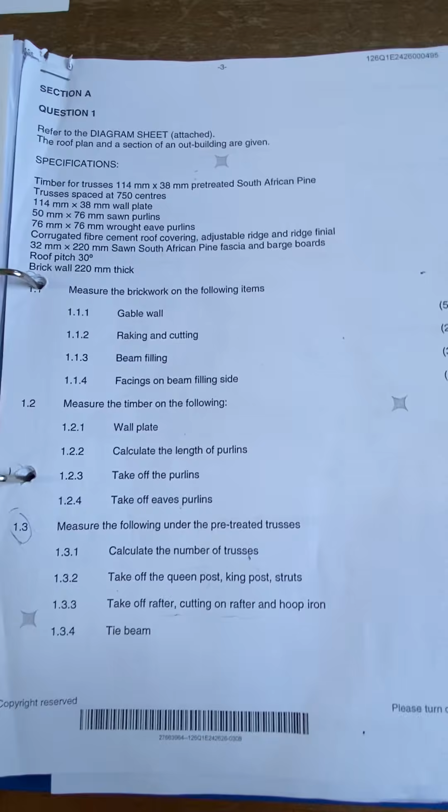Morning, guys. Today we're gonna be looking at a roof.

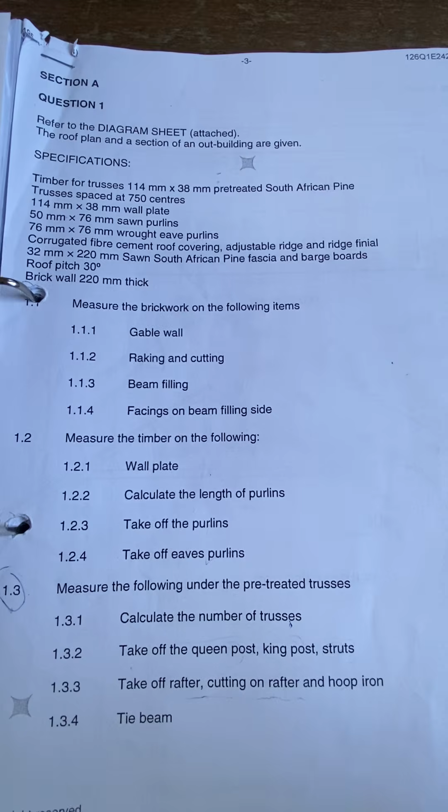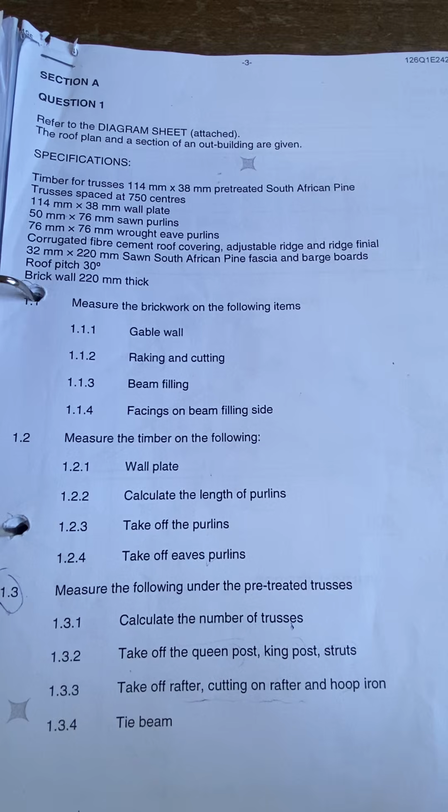Okay, so this is info roof. So basically, the question goes like this: it says, refer to the diagram sheet attached. The roof plan and a section of an outbuilding are given. So you're gonna analyze the roof just now, the addendum there. Then it goes like timber roof truss. It is made up of 114 by 38 treated South African pine. Trusses are spaced at 750 center to center.

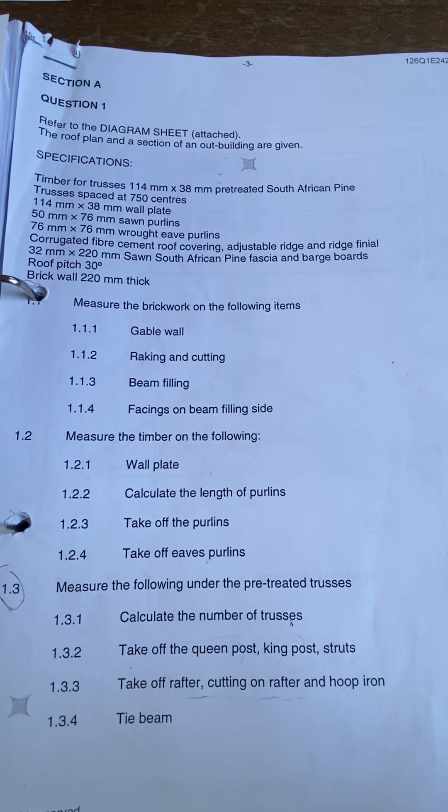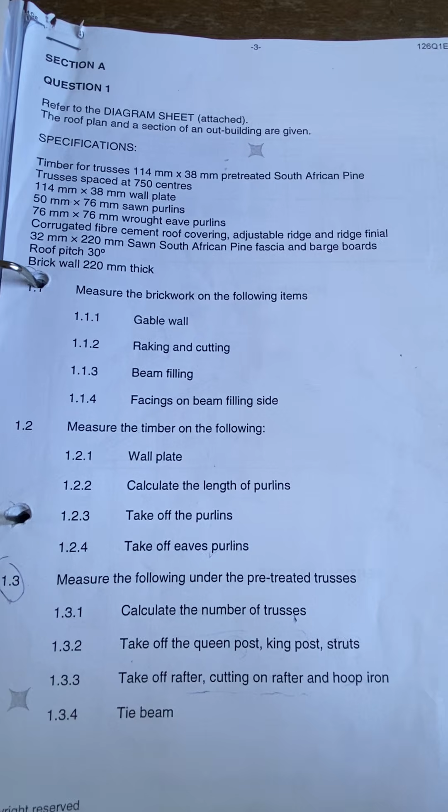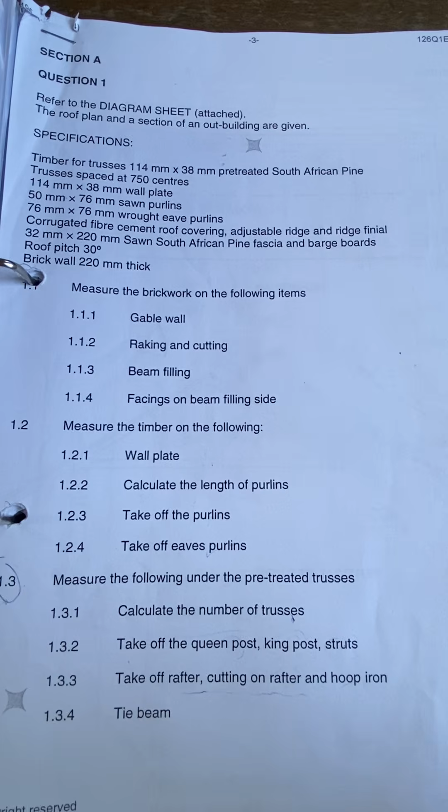And then 114 by 38 wall plate. We have 50 by 76 millimeter sawn purlin, and we have 76 by 76 wrought eave purlin. Okay, we've got corrugated fiber cement roof covering, adjustable ridge, and ridge finial, fascia. 32 by 220 sawn South African pine fascia and barge board.

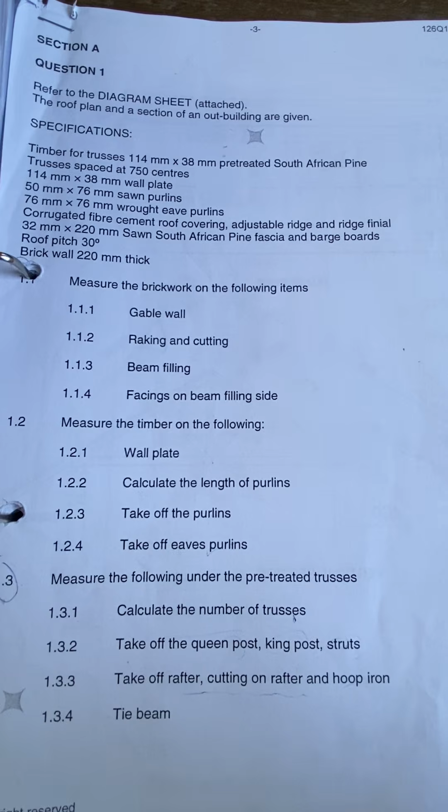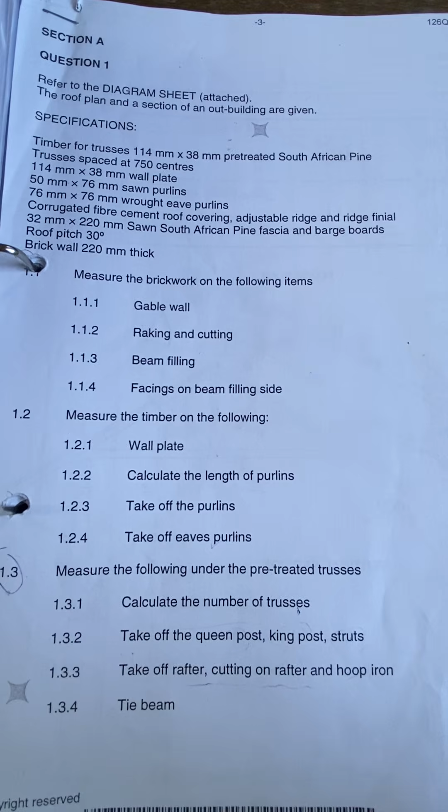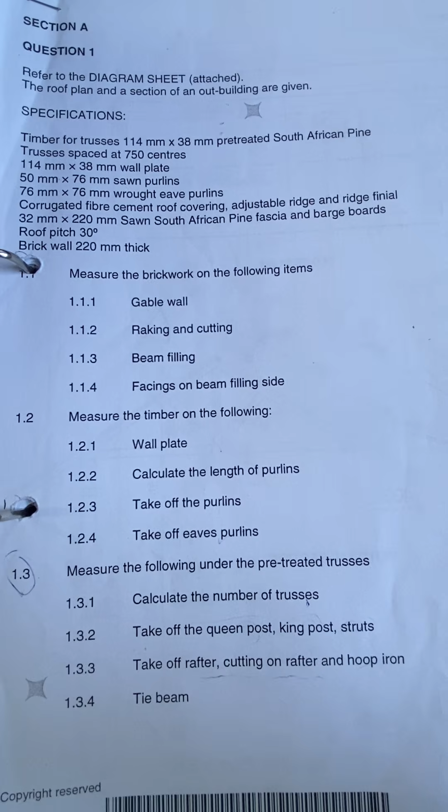The pitch of the roof is 30 degrees. We have a brick wall of 220, meaning one brick wall. Then we've got question 1.1, which talks about the gable wall. Then we've got 1.2, which talks about a timber. Then we've got 1.3, which talks about a timber, but the roof truss.

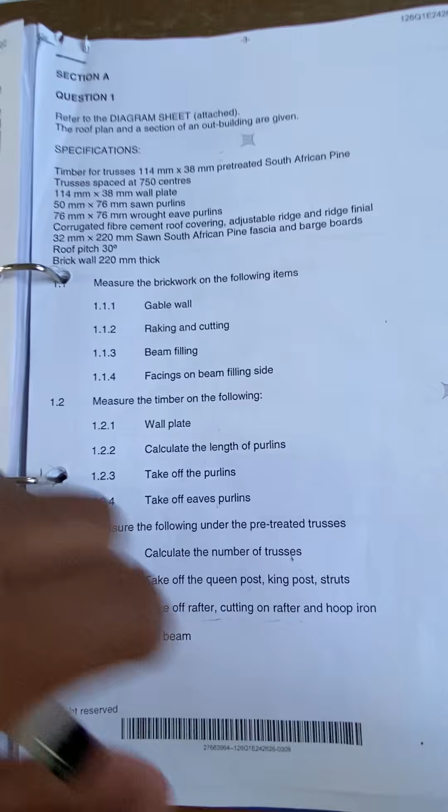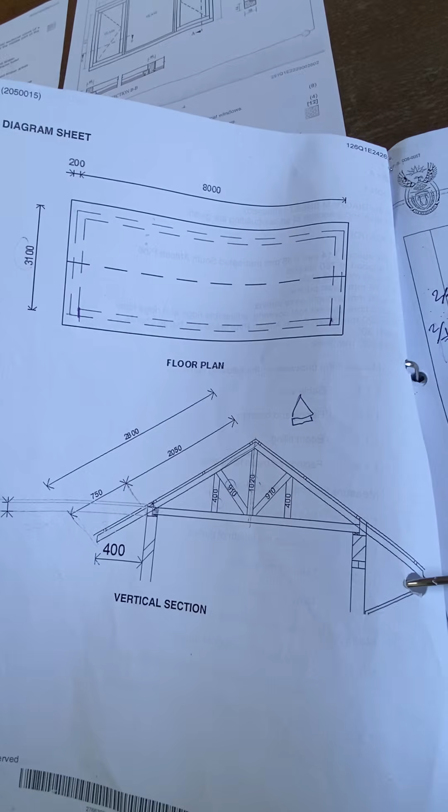Okay, so let us analyze the drawing. The roof is given like this: from corner externally to corner externally of the brickwork, it's 8,000. We've got an overhang of 400. On the gable side, we've got an overhang of 200. The width of the building in brickwork, external to external, is 3,100. Then we've got a section here which shows the overhang of 400.

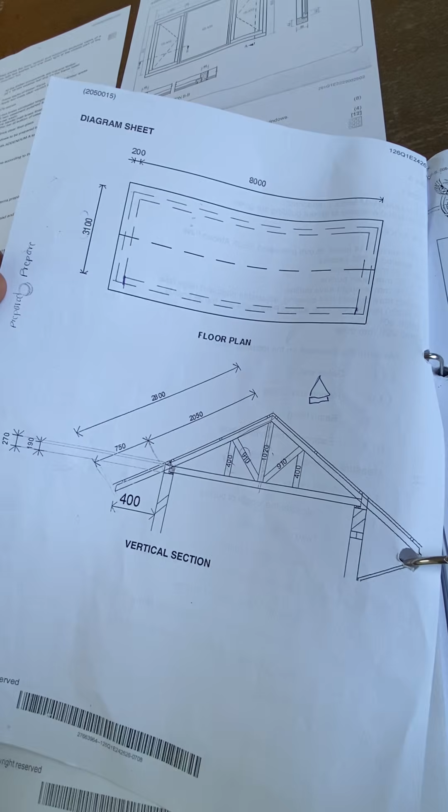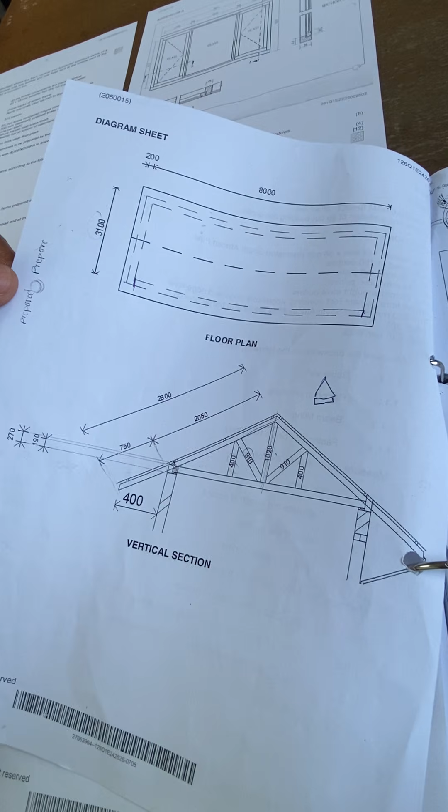We've got a tie beam, a South African truss. We've got a 2.8 rafter. Other measurements are given there. We can clearly see that we've got a beam filling, and also we've got a wall plate under a truss. There are the dimensions of the beam filling on the side: 270 is the highest height of the beam filling, the lowest is 190. Okay, so that's the drawing.

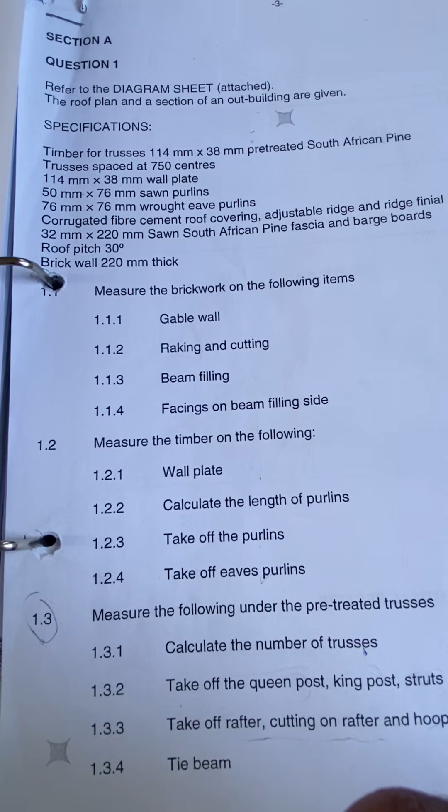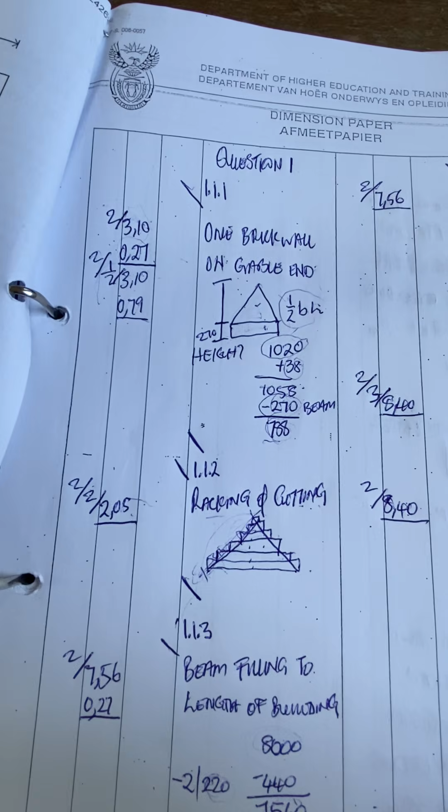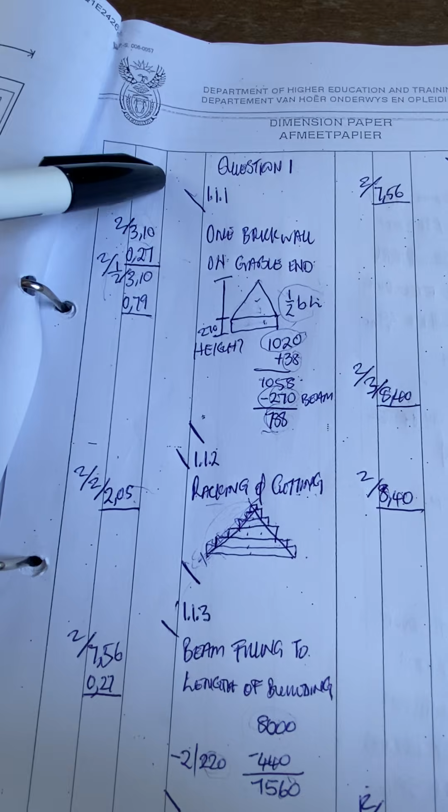Now let us see what is the first question. They say measure the brickwork on the following item: the gable wall. Now, what you need to understand about a gable wall is it's made up of two shapes: a rectangular shape and a triangular shape. Remember this is dimension paper, consisting of timesing, dimension, squaring, then a description. On the description, this is where you will describe your wall: one brick wall on gable ends.

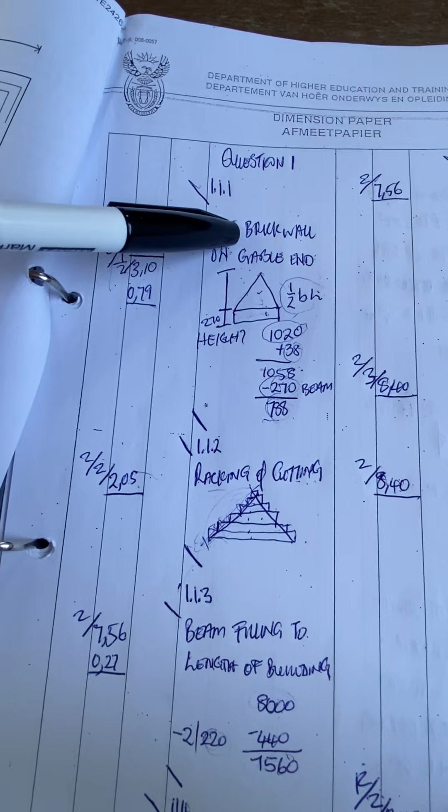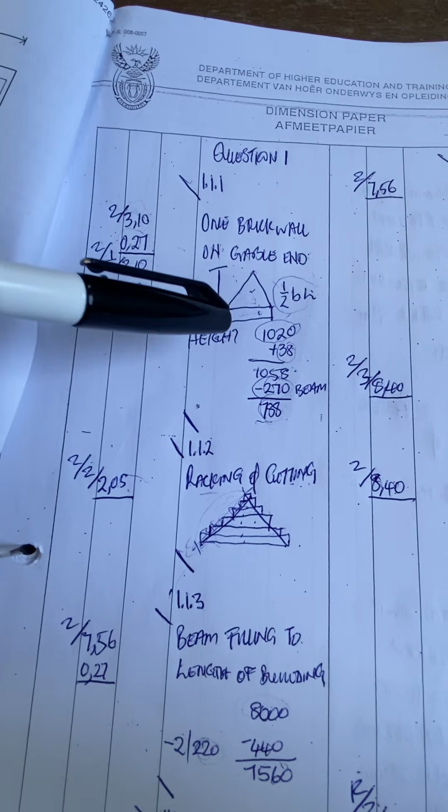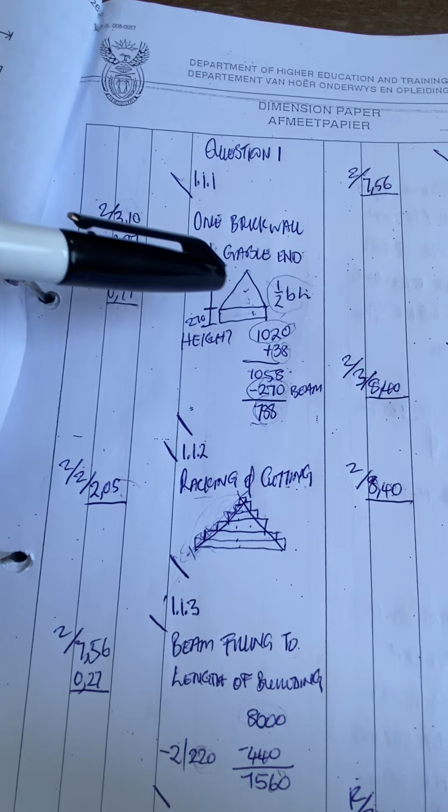So I drew the shapes of a gable so that you can understand. What you see here is a triangle on top, and what you see at the bottom is a rectangle. This rectangle is of a beam filling, so it also appears on the gable end. Because of the gable end, I need to understand the height. When we analyze the drawing, we can clearly see that the height of the roof truss is given at the king post as 1020.

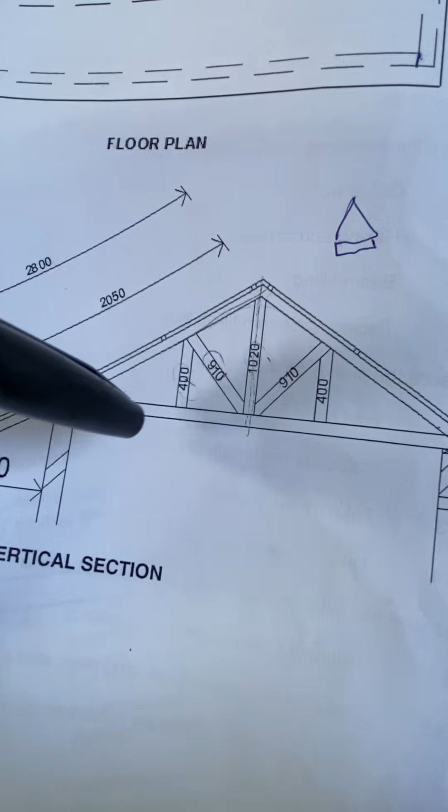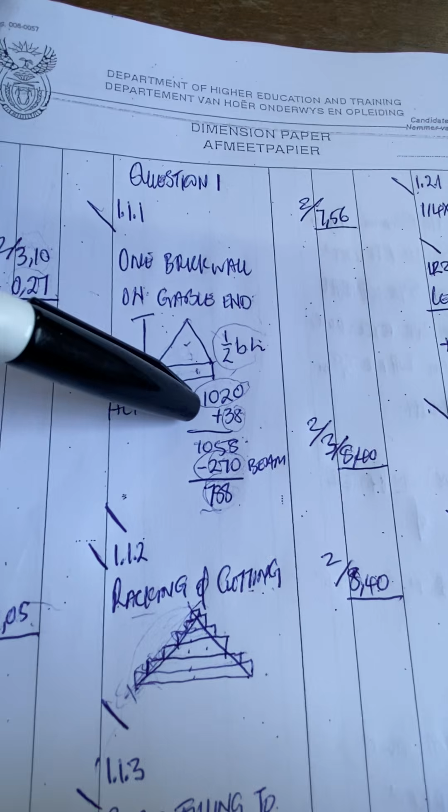But we know that this is sitting on a thickness of 38 for a wall plate. So the brickwork on gable ends will start below the 38 of the wall plate, which means that 38 is part of the height of the brickwork on the gable end. So we have this 1020 of the roof truss, and we include 38 because it's part of the brickwork of the gable end, so that we have 1058. That's the overall height of the brickwork, including the triangle and the rectangle.

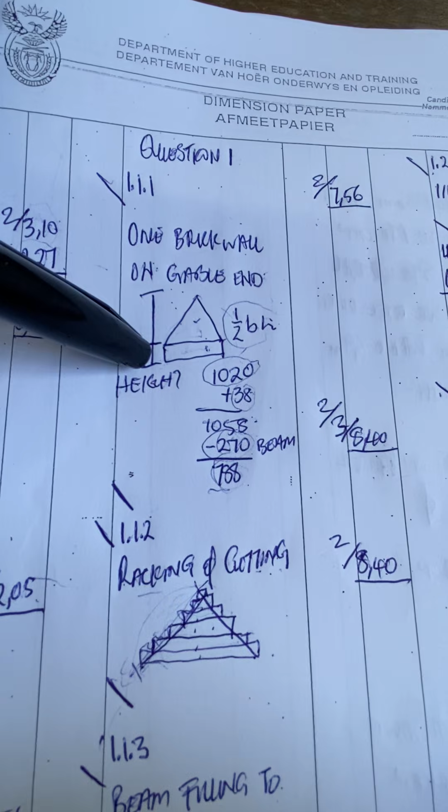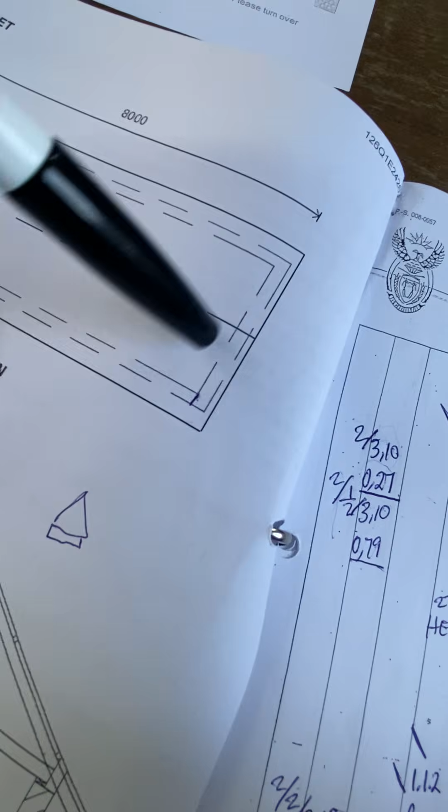So how we measure this: remember, when we measure a rectangle, we need to follow the order of our dimensions. The length is taken from the gable side. On this gable side we have this measurement 3.1, that is why you see 3.1 here. That's the length. The height is given here, the dimension of the beam filling. We take the highest one.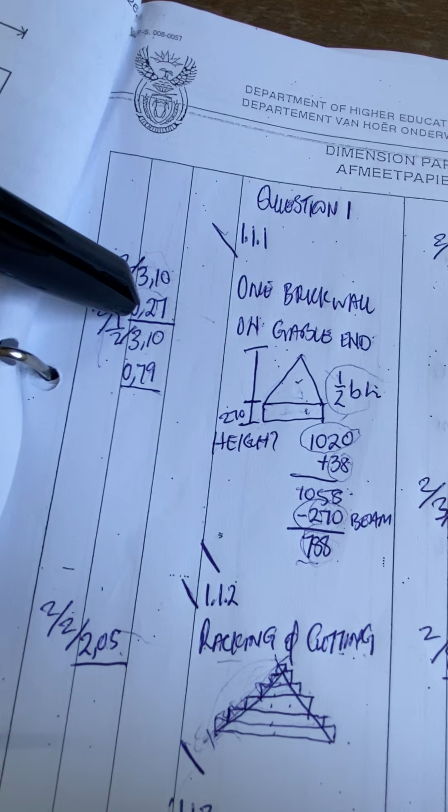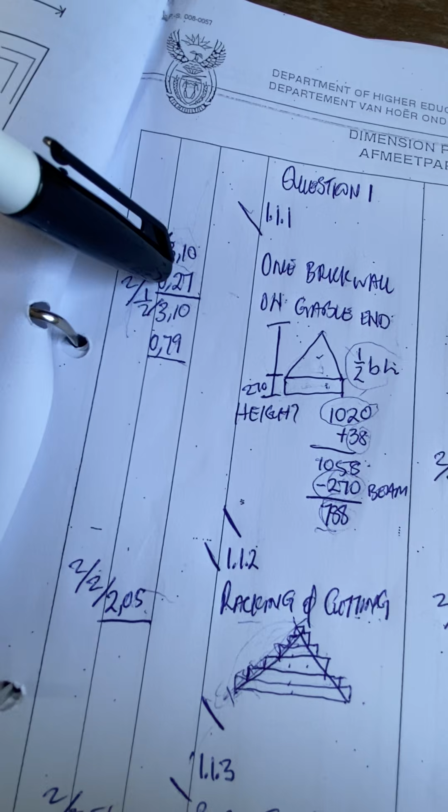So this is the area of the rectangular brickwork on the gable end, and it is of the height of the beam filling. Now this is one side. 3.1 times 0.27 is one side, and because we have two sides in the building, we multiply by 2.

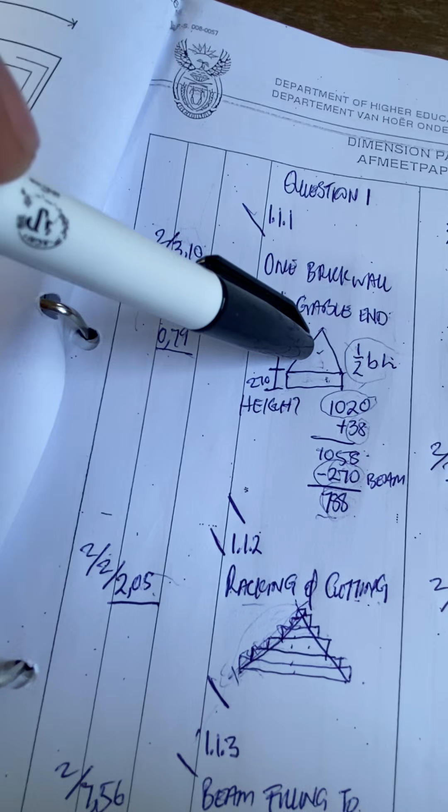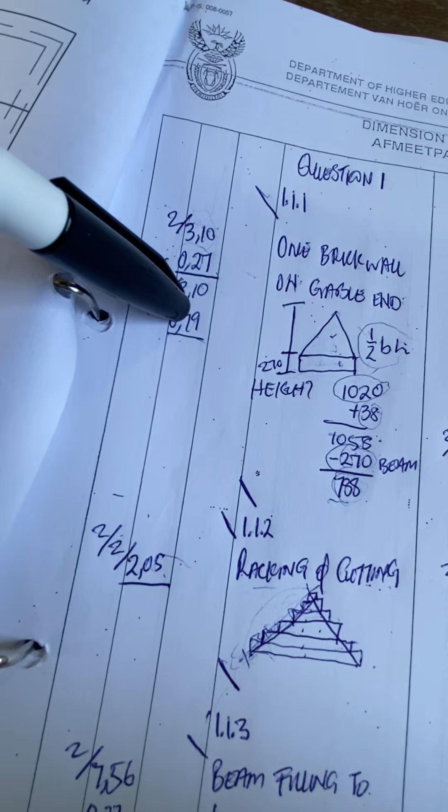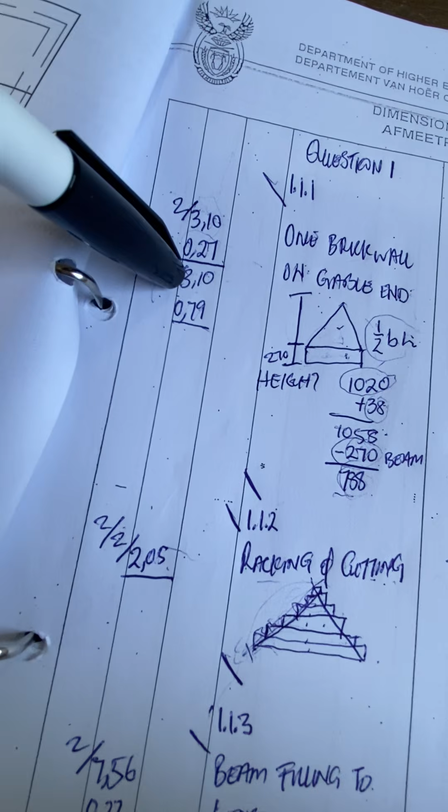Now, since we are done with the rectangle, we need to do the triangle. We all know that the formula of a triangle is half base times height. When we express the dimensions here, we need to follow the formula to indicate that it is a triangle. That is why you see half, our base is 3.1 and our height is 0.79. How did we come to 0.79?

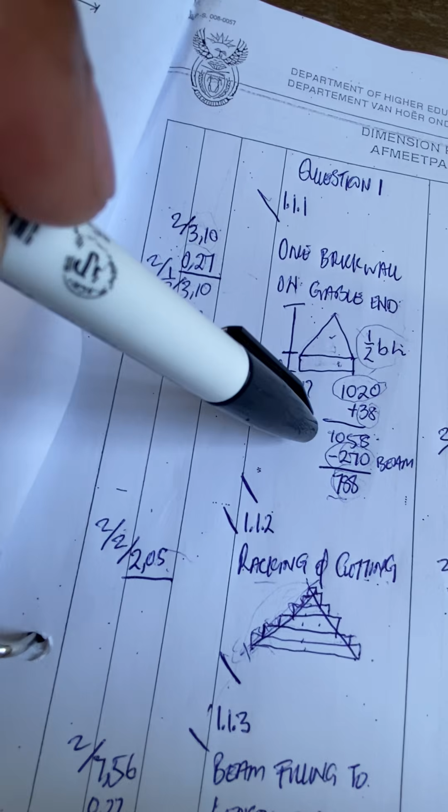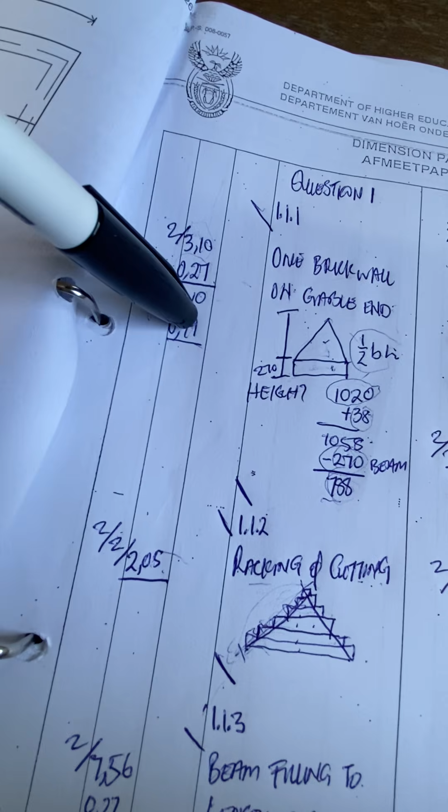Remember, the overall height of the rectangle and triangle is 1058. We minus 270 simply because we have dealt with 270 first. To include the triangle alone, out of this overall height we subtract 270 so that we are left with 788. In meters, this is going to be 0.79.

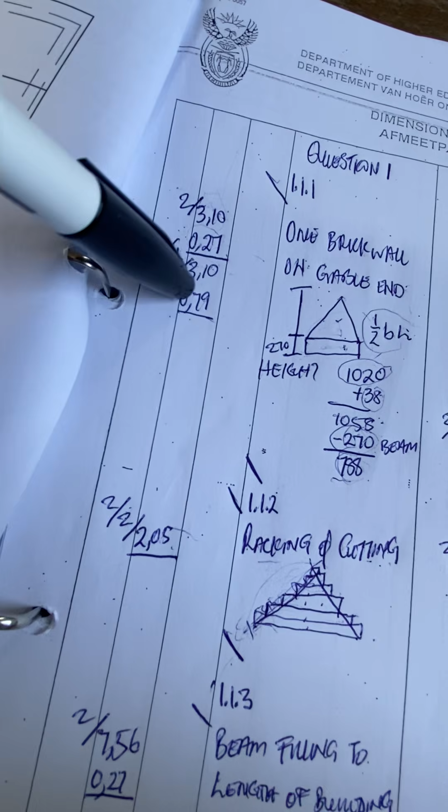Okay, done about the brickwork, because once you say half base times height, you need to say times 2 to include the other side. Okay, so the next question says, let us do a raking and cutting. So to do a raking and cutting, this is what you're gonna do. You're gonna indicate that you are doing a raking and cutting.

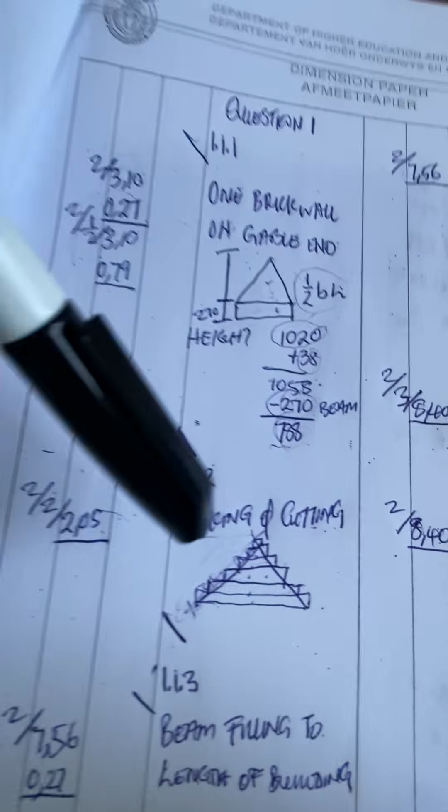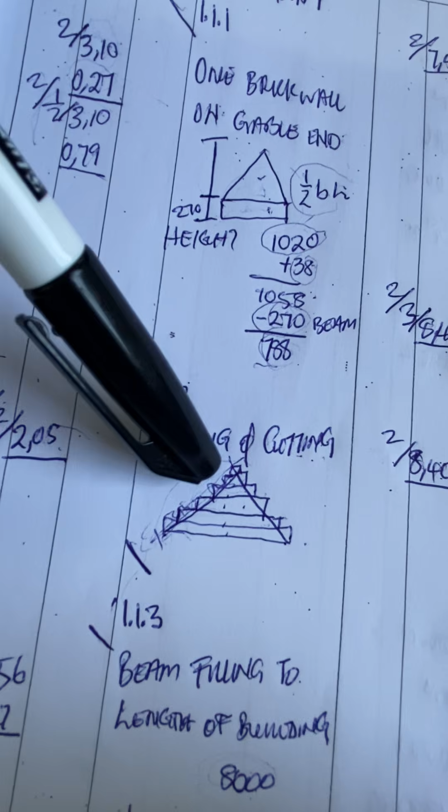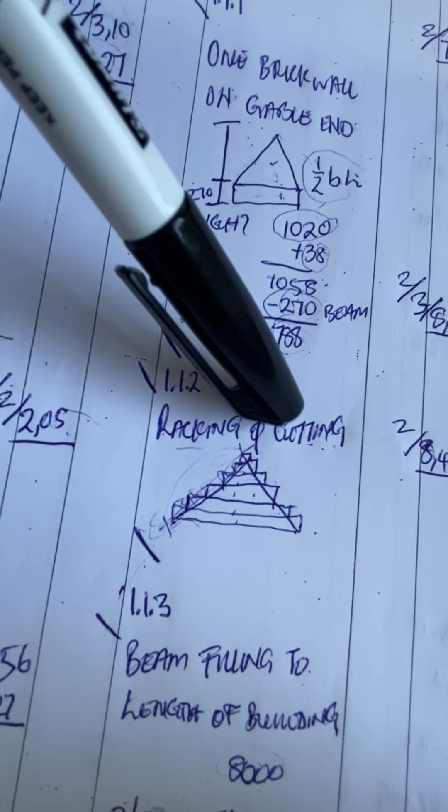When we build that triangular shape of a brickwork, we are using rectangular bricks, which will leave us this shape of steps on both sides. So for us to get a clear triangle out of this shape, which are our steps made up of brickwork, we need to cut this projection so that we can have a smooth triangle like this.

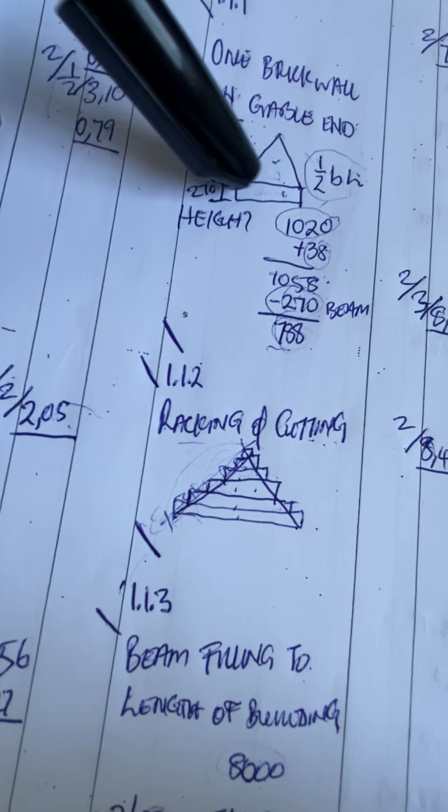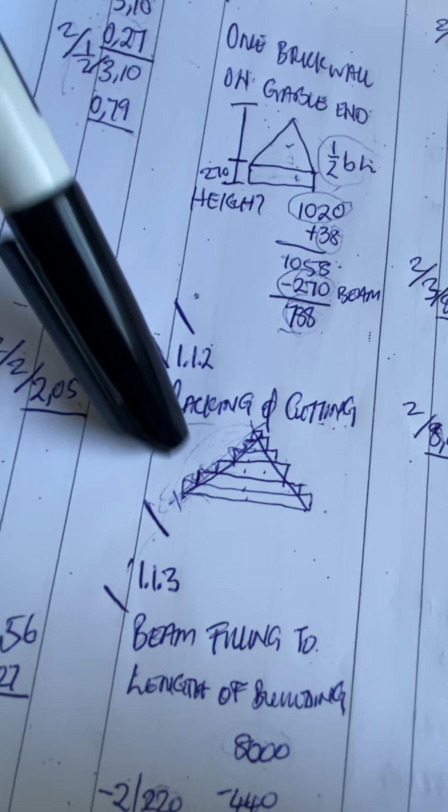If you are using bricks, you can't simply get this smooth triangle. You will get something like this, but you will have to cut this raking. That is why we are doing the raking and cutting. You're gonna remove this raking by cutting. So that is how we get this smooth triangle. I drew this so that you can relate to what I'm saying.

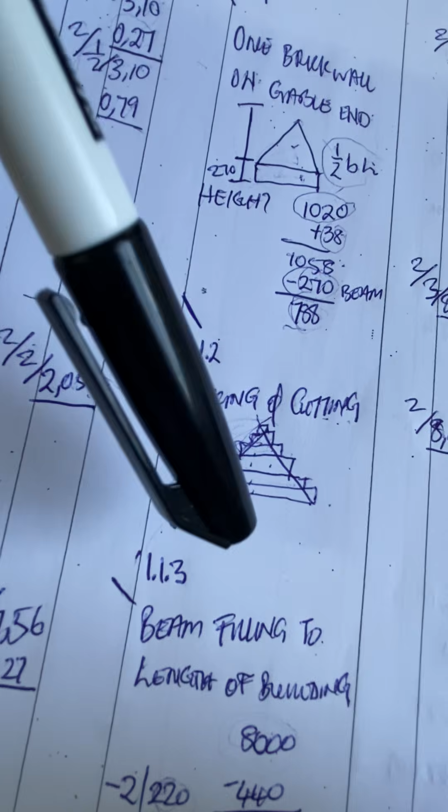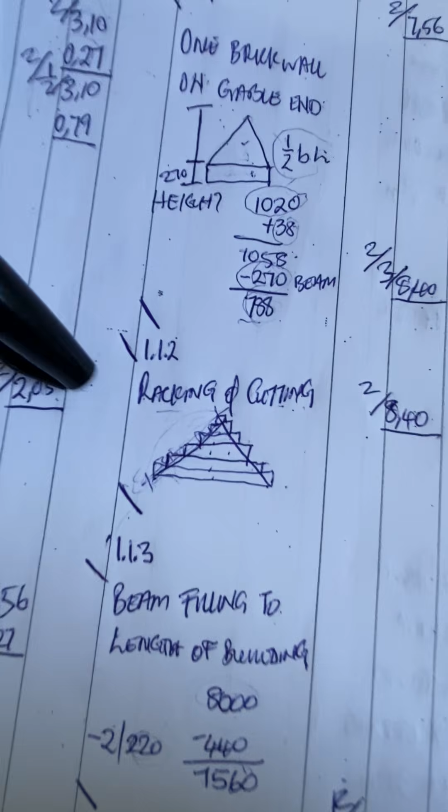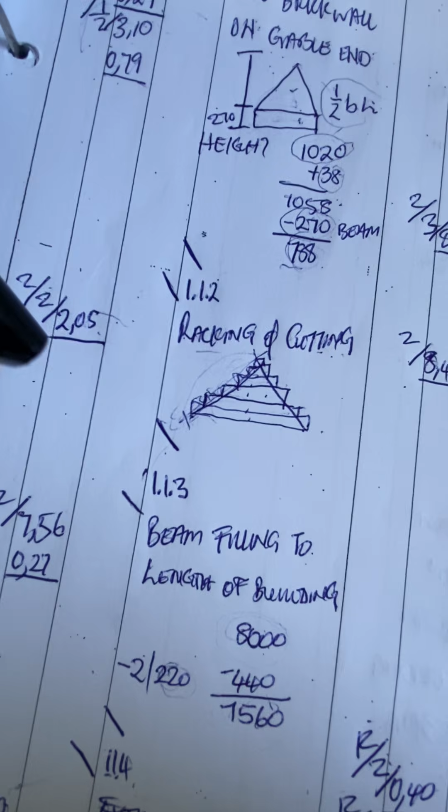So this thing is measured in linear. If we measure this in linear, how much is this side of a triangle? There you go. This is the size of the triangle. It is 2050. So we come back here. We have 2050. This is just one side. So to include this other side, we're gonna say times 2. That is just one side of the end

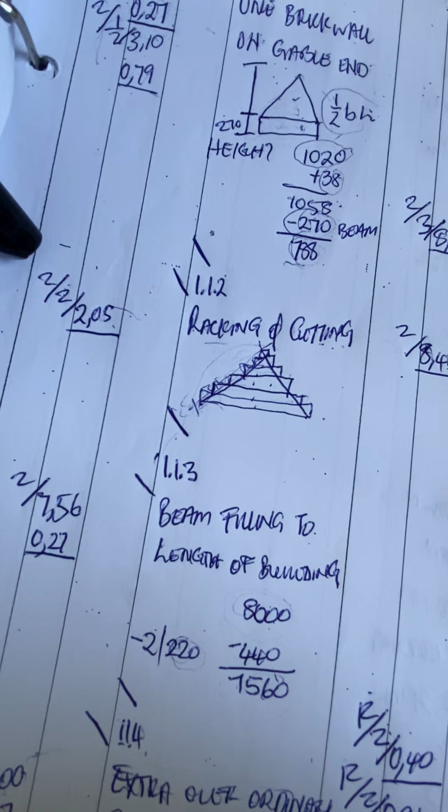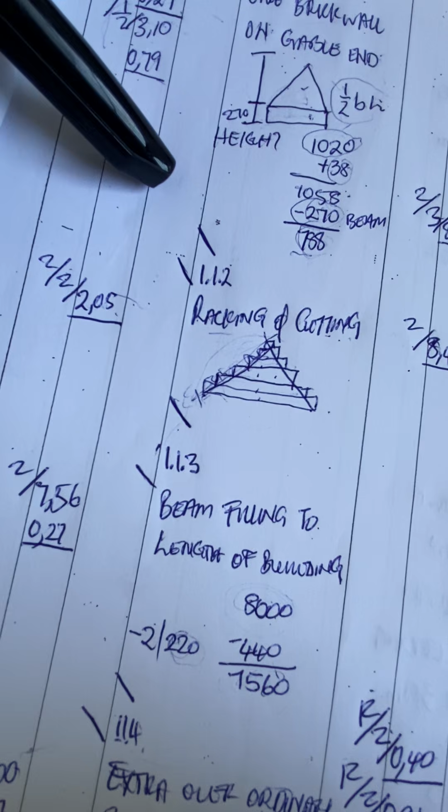of a gable. So to say there's an opposite side that looks like this, you want to say times 2. This is 2050. Within this triangle we have two sides; that's the first 2. To include that there is an opposite side on the building, that's the other 2. I need you to understand that.

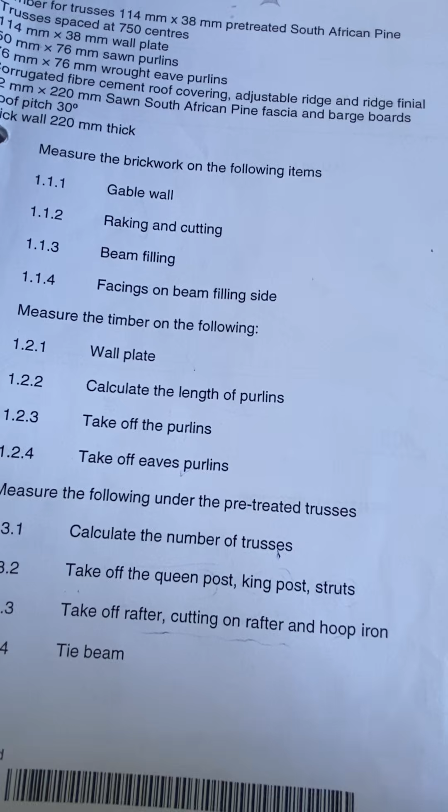Then the next question says, let us do a beam filling. So this is the gable side and that's also the gable side. As you see what I drew here, this is the end of a gable. This is also the end of a gable. Where you see these lines, that is where you will find the beam filling. It takes the internal measurement, because on this side we have a gable and the brickwork.

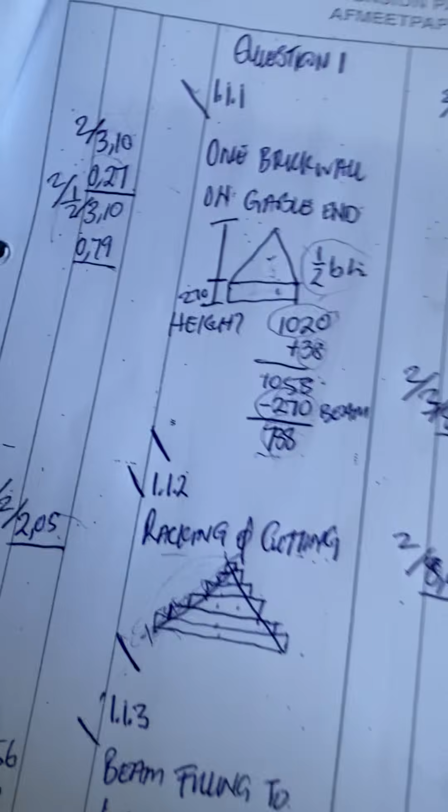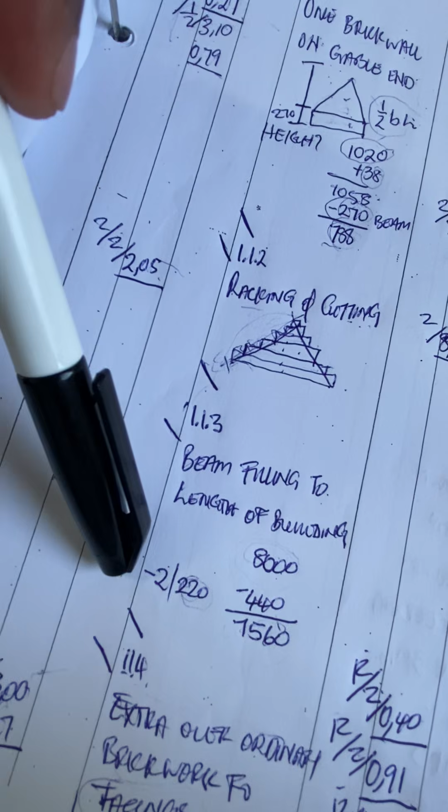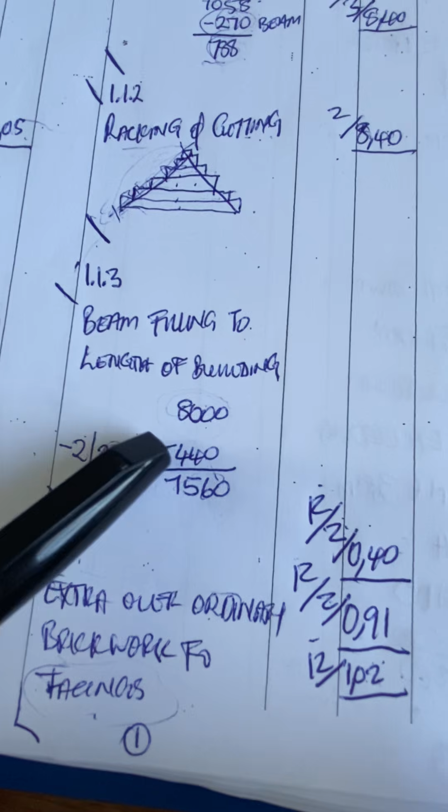So if we understand that this is the length of a beam filling, we have a beam filling to the length of the building. The length is 8,000 external to external. To come to internal, we need to subtract 2 times 220, which gives us 440. The 220 is the first one, the second one is on this side, which makes 440. So 8,000 minus 440 leaves us with 7,560.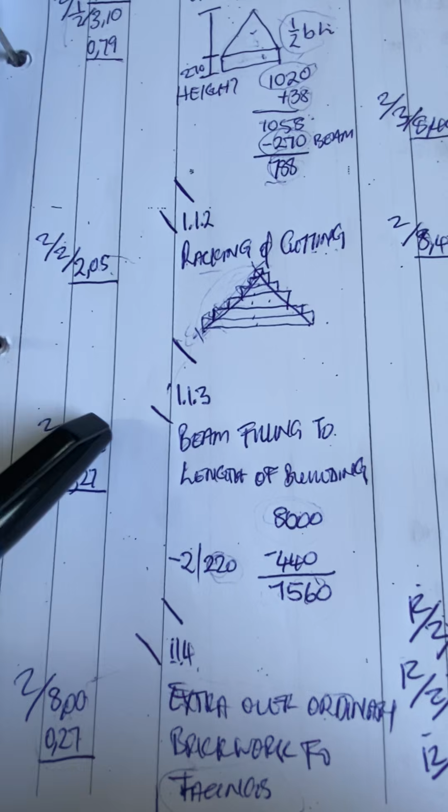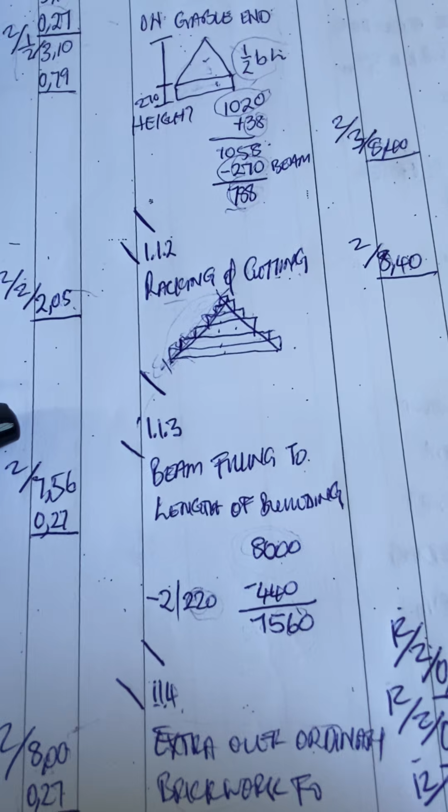Then we take this and come here. We say the length is 7,56. Now the height of a beam filling is 0,27, given there. This area is for the one side. If it is the front side, at the back you also find the same thing, because we have an opposite side. That is why we say times 2. Clearly, that is what we're going to be doing.

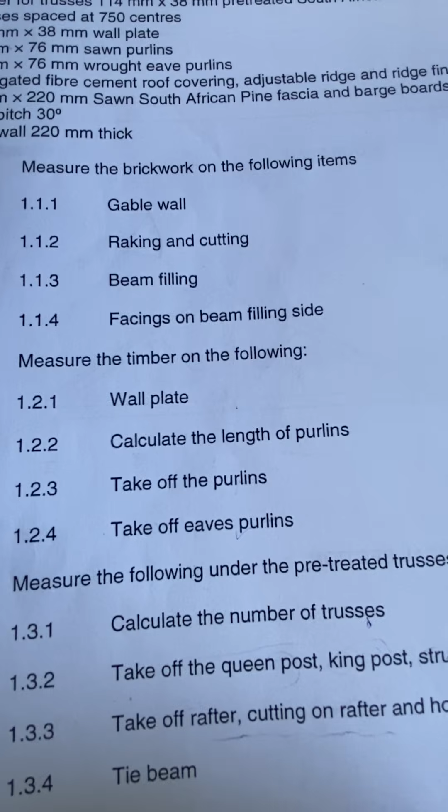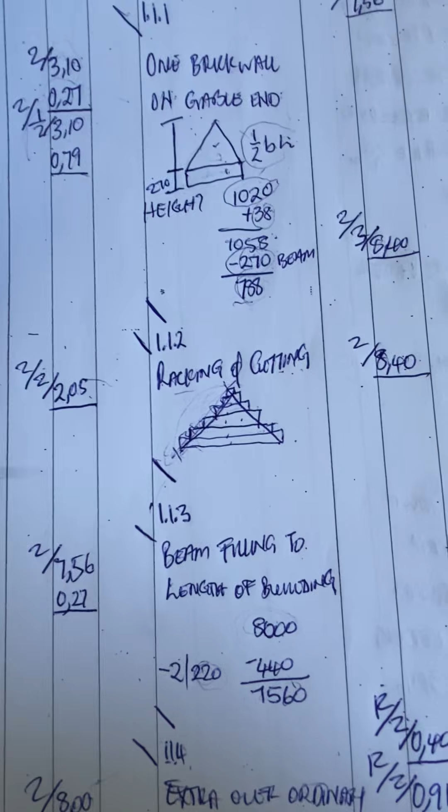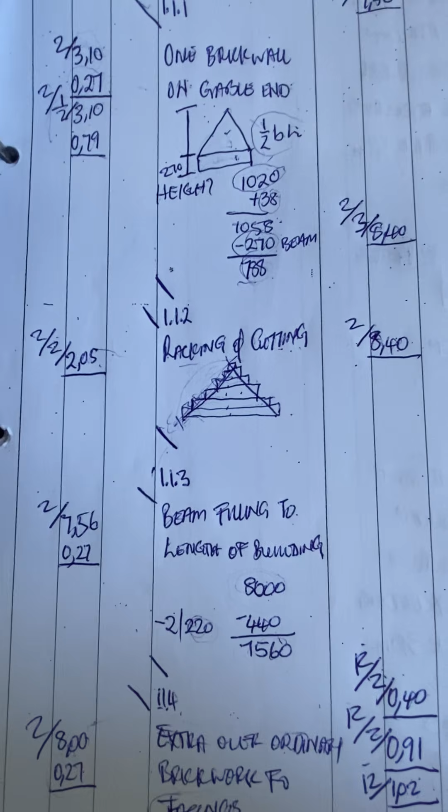Then the next question says measure facings on a beam filling side. Now guys, I need you to understand this. Before we determine the measurement of the facings, what are the facings? The facings are the pattern that we see on the elevation side after the building has been erected.

How did they lay the bricks? It's 220 one side, 220 one side. That gives me an indication of English bond. So since that's English bond, what I see are the facings. Let us get back to the question. Since we understand the facings now, you describe these as extra over ordinary brickwork for facings.

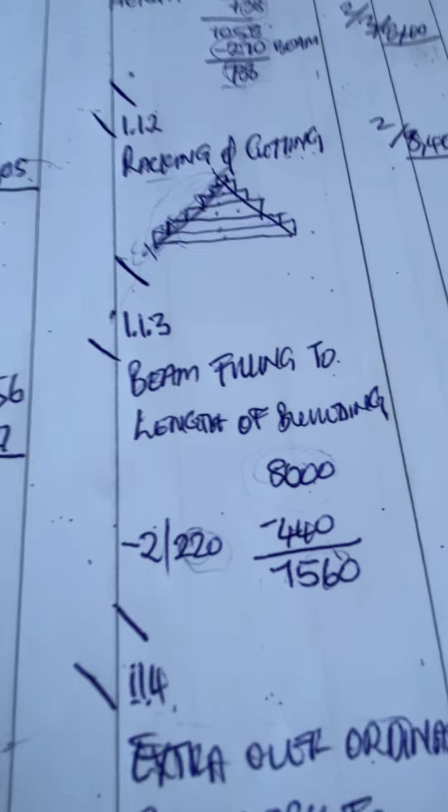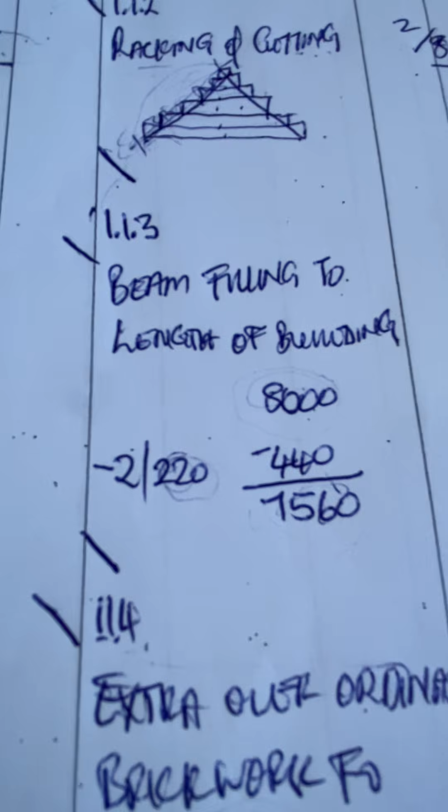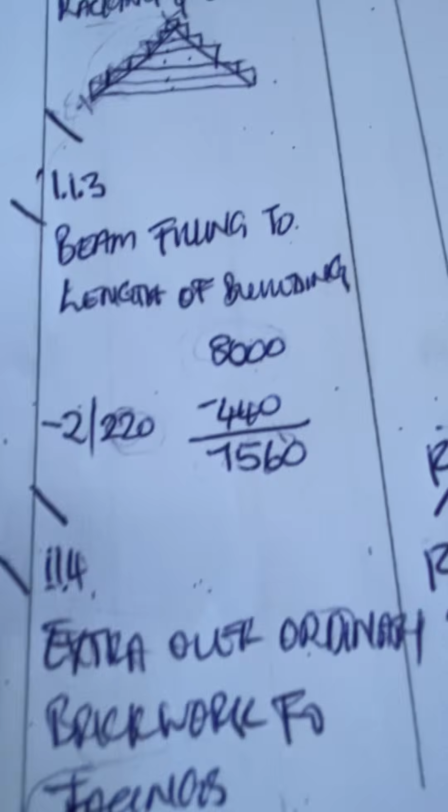Why are they extra over? Because we have dealt with the brickwork alone. We are still measuring the brickwork now, but for the second time. Since we're doing it for the second time, this becomes the extra over, because it's not the first time. Now we understand the facing.

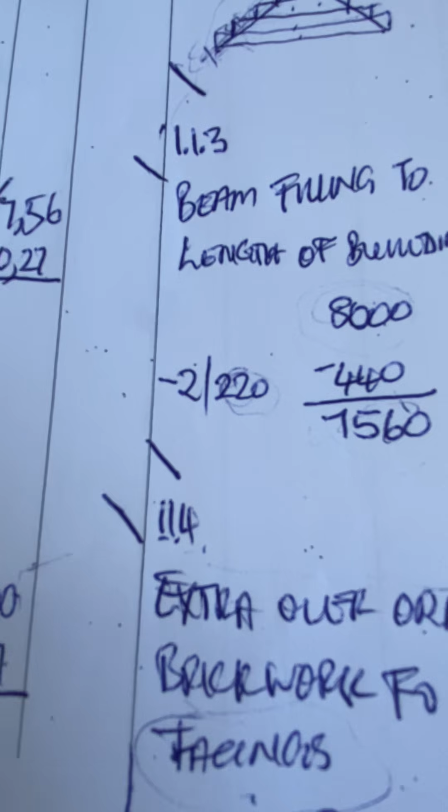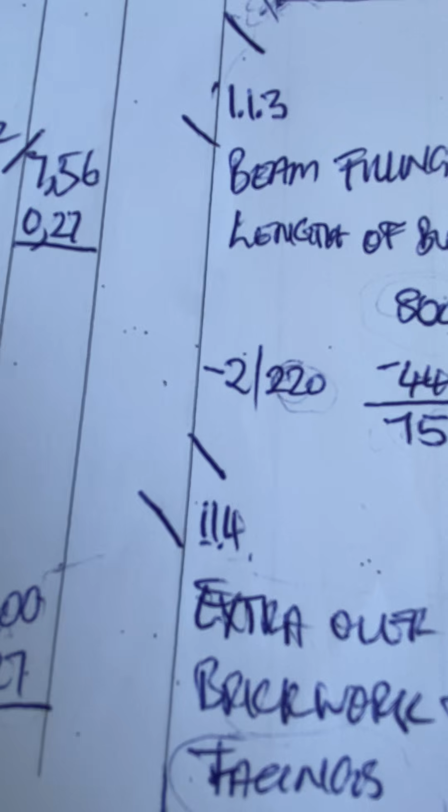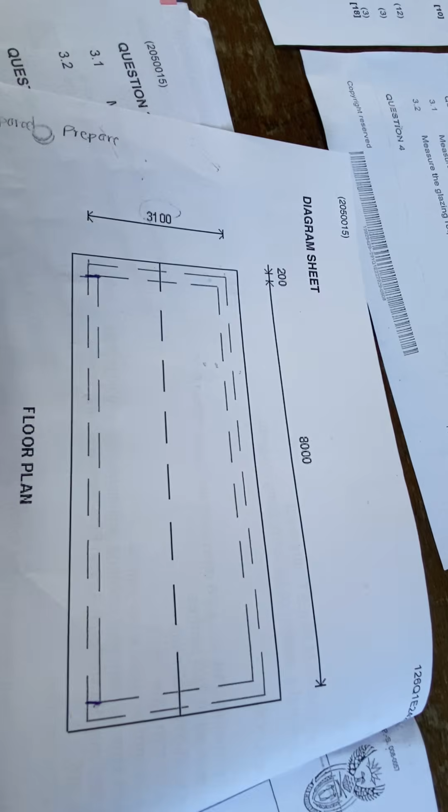When we look at the beam filling, remember I said at the gable end we have a rectangular shape of brickwork which stands for a beam filling, before the triangle side. Even on the gable end we have brickwork for a beam filling, while we also have a beam filling on this side. The beam filling we measured as brickwork starts from internal measurement. But when we look at the pattern of the brickwork, it starts from external to external.

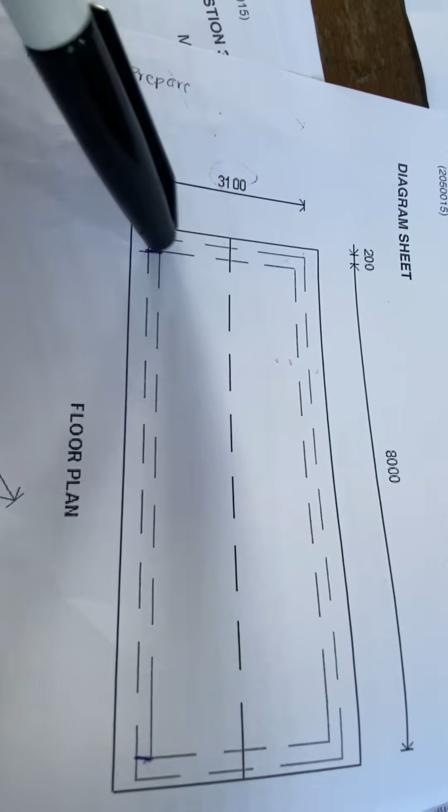External to external, those are the facings. The pattern of a beam filling doesn't start from internal, because we also have the brickwork in beam filling as a rectangle here and here, so we have it all around. That is why we take 8,000 as the length, not 7,560. So 8,000 times 0.27 for the front side. To include the back side, we say times 2. So we are done with 1.1.

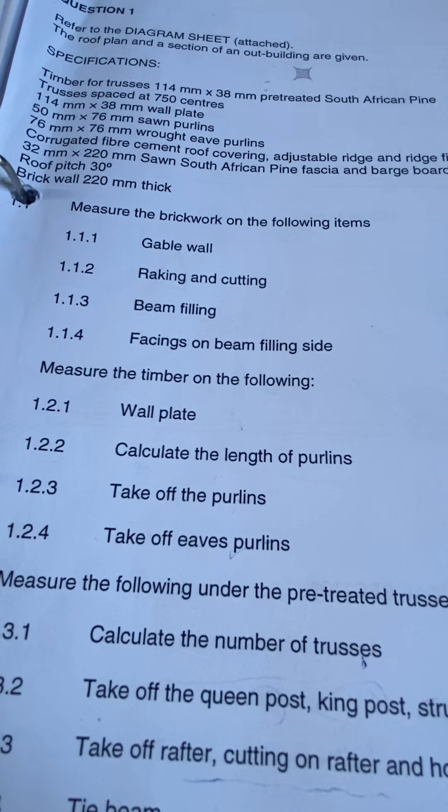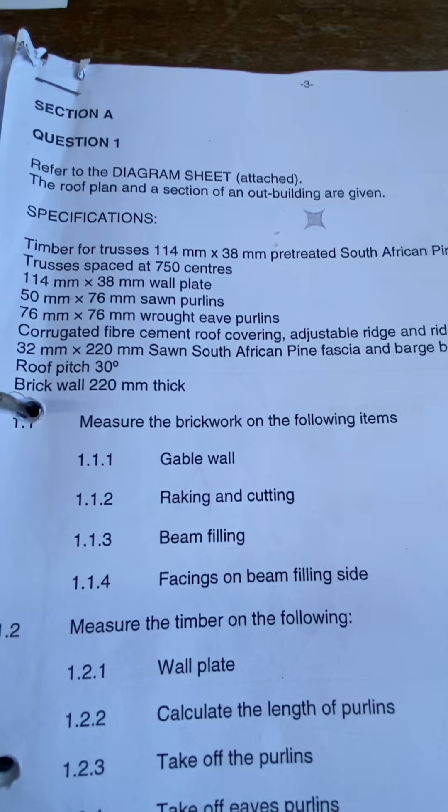Then we're off to 1.2. Measure the timber on the following item. We first have to measure a wall plate. Here we were told that the wall plate is 114 by 38.